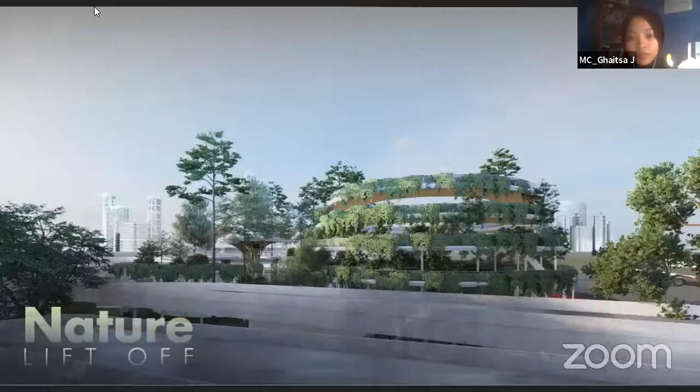Okay, so good morning everyone. My name is Amira, and here I'm with my teammate Zaki as this competition presentation's opener. We're hoping that this will be a good start for other competitive designs. Here we're going to present our thoughts on the future of Eco Park and how it leads to a biodiverse ecosystem in a metropolitan city like Jakarta.

We know that this earth is not only for human living things, and we as human beings must act on how design can focus on creating a more biodiverse environment, such as an eco park. So the precious open land needs an idea to overcome the lack of biodiversity and drastic climate change.

Parallel with the UHI expansion, where the center of Jakarta becomes the starting point of the UHI phenomenon, we decided to focus more deeply into this area. So here my teammate Zaki has been living in Tanah Abang for 2 months for his internship.

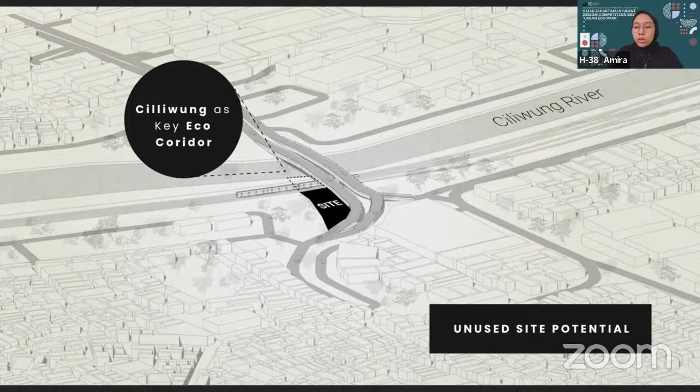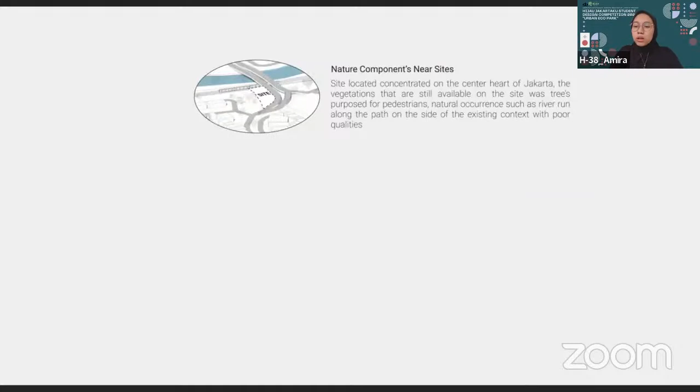Here, we're trying to conclude the site's potential and problems, and how we try to take an approach into the design to make it somewhat more biodiverse, a much better eco park. We need to somehow take the opportunity from the nature component the site gave us. Because of the wasted potential of the site, bordered by railway and bridge, we try to connect it.

So Tanah Abang has been famously known for its highly dense area. It's challenging to accommodate the need for oxygen with only approximately 3,000 square meters of site area. So for a more detailed presentation of our design, it will be presented by Zaki.

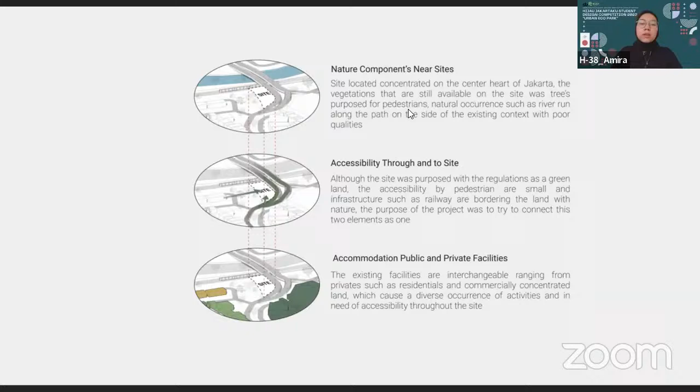It is clear that the lack of nature and biodiversity in urban cities is a pressing concern that requires immediate action. Embracing biodiversity not only benefits the environment and wildlife, but also improves our quality of life and strengthens our communities. Thus, implementing an appreciation for ecological serenity improves the urban scene.

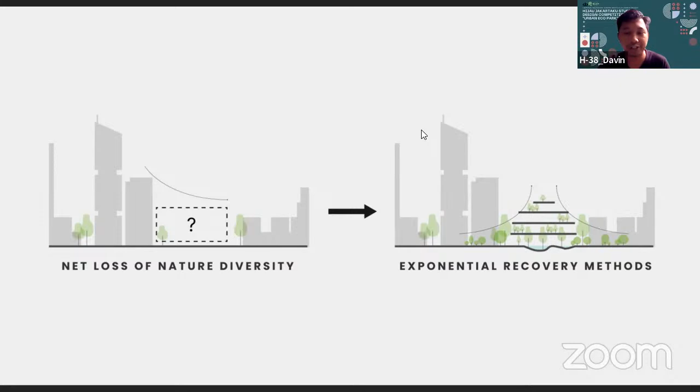Of utmost importance are the sensibilities about how each element is integrated, creating a unique way of living. To improve this further, the proposed design uses a multi-layered plate and implementation of vertical gardens, not just to improve the site's capability to absorb more heat, but also to increase the chance for the environment to thrive and self-regulate, creating symbiosis. This also creates an opportunity to act as a barrier and filtration for regulating microclimate, such as winds that come into contact with the infrastructure.

To develop significant value for the eco park, this parameter was specifically implemented to create justifiable design criteria for the design output: appreciation, meaning taking inspiration and cultural meaning, benefiting from the expression of nature; knowledge, for the purpose of resources, scientific study, and environmental monitoring of the site; products, as in sensible harvesting; and lastly, services, to provide basic life support to the surrounding area.

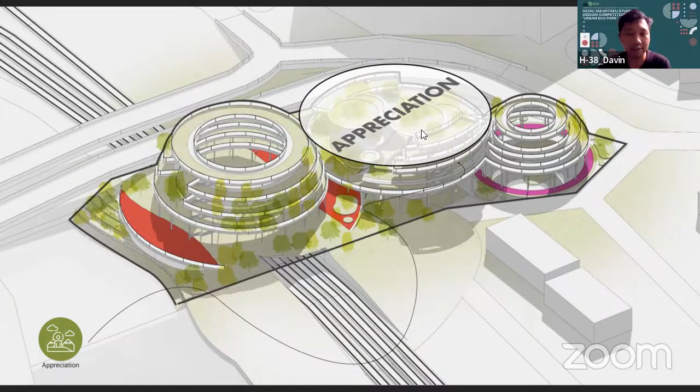The allocated space is about 35% properly, as a research center was implemented for the use of onsite monitoring and flexible adjustment to the environment, with adjoining research facilities for further development.

Eco exhibitions are used for the communities as an interactive way to increase awareness and give codes of conduct in eco parks. The allocated space for this is around 30%.

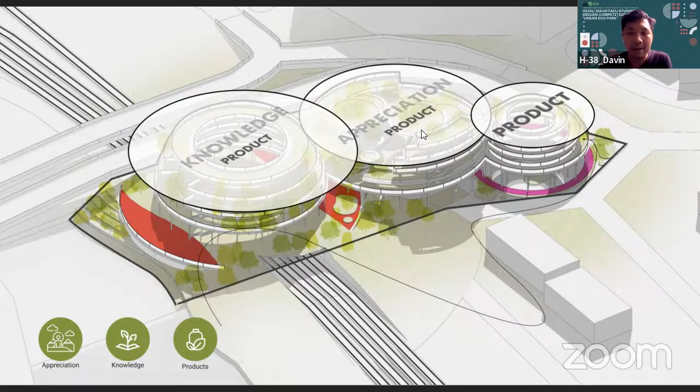To provide a wide range of functions integrated into the design, products are implemented into each module. The plants are used also as a resource for food, such as berries along the path, and ornamentals such as flowers that are responsibly picked and help to maintain. The allocated area for this function is about 50%.

The design is further developed to have integrated functions acting as life support in each corresponding context, to have specific impacts on its unique surroundings. Now we dive more into the allocated program.

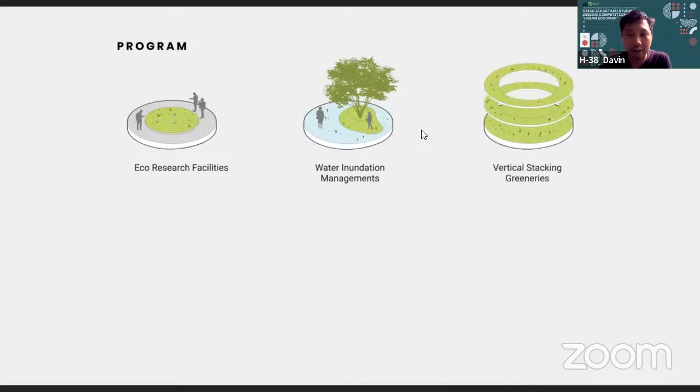The first one is eco-research facilities with a percentage of 5% to be able to handle flooding, and also water inundation management implemented with a percentage of 10%. Vertical gardens are rethought as a stacking mechanism to accentuate a breathing structure through the city with a percentage of 45%. Eco exhibitions as a system of permanent exhibits occur on the site for the community with a percentage of 5%.

A flower meadow with all-seasons blooming creates sustainable relations with pollinators with a percentage of 20%, give or take. Viewing areas to observe nature or for leisure are allocated 15%.

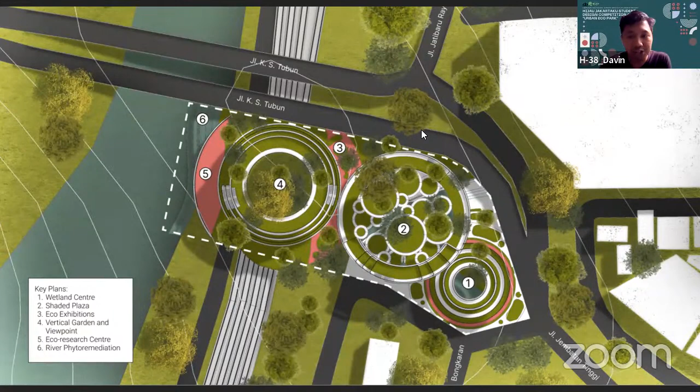Here is the top view of the site plan with the allocated programs that were explained. The ratio of softscape to hardscape is equivalent to about 70% to 30%, showing how nature is prioritized. The site systems used to further increase the function and value of the eco-park include water management, viewing points, habitat preservation and creation, and the use of plants such as all-year-round bloom.

Here are some details of the infrastructure on the site, and here are some visualizations of its use. Firstly, our shaded plaza creates an opportunity for the community to interact, appreciate, and increase knowledge from infoports regarding the ecosystem and sustainable demonstration from the infrastructure.

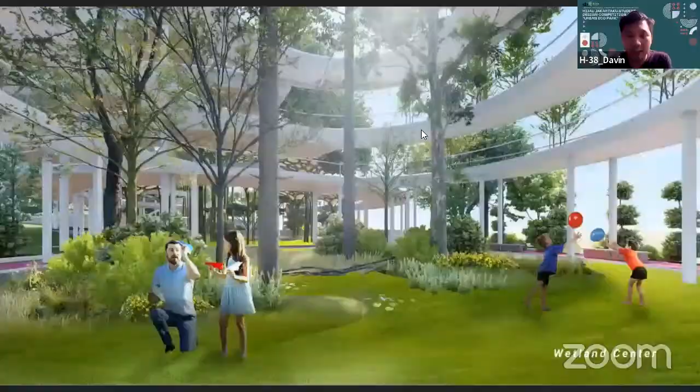The wetland center is designed to be seasonal so that it could be more resilient to unpredictable weather and used as a more active spot for communities. It changes into a more contemplative state, creating a serene look of a pond or lake and providing a sitting area to watch and enjoy the beauty of green and blue elements, while also being beneficial for bioretention using swales.

It changes into a more contemplative state through exhibitions implemented on the site, used for the communities to gain a more knowledgeable aspect from an ecological point of view and increase knowledge for the communities.

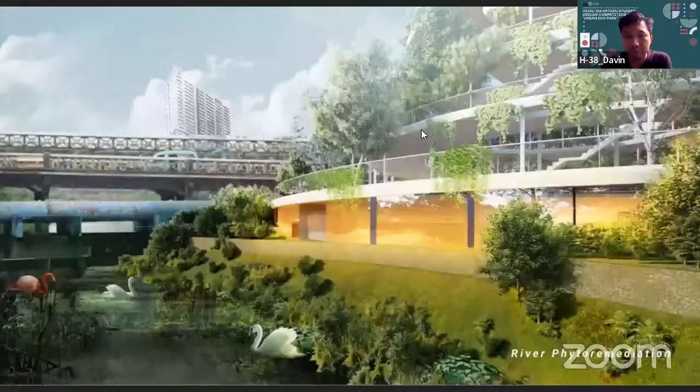This is some information about the river revitalization, designed with the use of the natural mechanism of phytoremediation in hopes of bringing back the river to be a wildlife eco corridor.

Here is the visual of the Eco Research Center with natural daylighting and access for the natural elements on the site to be monitored intensely.

And here is the last visualization about the vertical garden, which also acts as a commerce walkway and viewing point, responsibly connecting nature with the human built environment. Thank you.

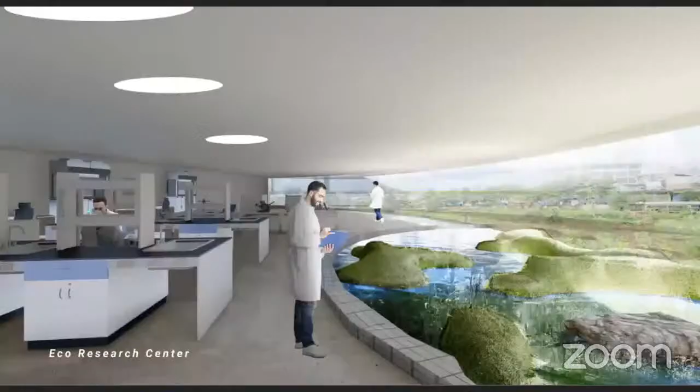Okay, maybe I'm first. We know that an eco park also needs maintenance. Can you hear my voice? Yes, we can. Okay, eco park also needs maintenance—what kind of environmentally friendly maintenance do you propose?

First of all, regarding the maintenance system, we try to implement the research facilities for the most part, but the materials we are trying to use are an easy module design, making it easier to dismantle and adjust for future development. So we try to use some steel and also ACP composite panel materials, so they can be used as recycled materials. And the monitoring from the research facilities helps intensely monitor the surrounding environment more frequently.

Okay, thank you. I suppose now it's my turn. Well, first of all, thank you for the wonderful presentation, wonderful slides, I should say.

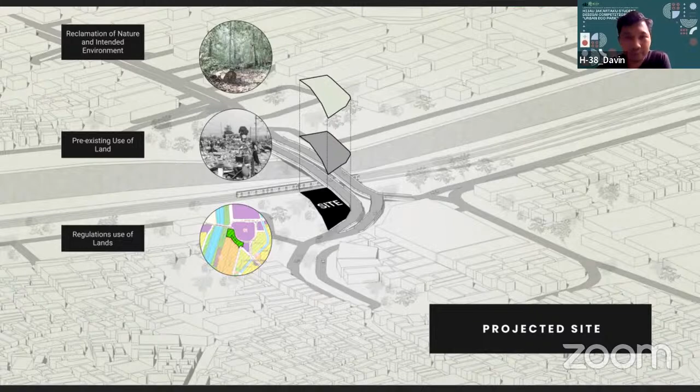All right, I think the first question is answered pretty well. But I believe if you could provide more info on that, it would increase the value of your design.

Well, I'm not talking about today's presentation, I'm talking about when we actually make the design. If we can provide some indicators, that would increase things and be better for us to talk to our clients - that's a selling point. So yeah, I think that's enough. Thank you for your answer. Good luck, thank you.

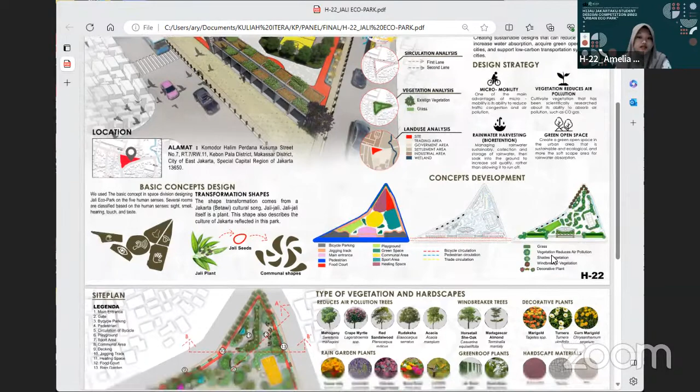There is a main entrance, gate, bicycle parking, pedestrian area, playground, sport area, communal area, bridge, jogging track, healing space, food court, and also a rain garden.

The size of the jogging track uses the standard size of 1.2 meters, with a field of 18 meters by 9 meters facilitated for the sport area. The bicycle parking shelter measures 4.2 meters by 2.5 meters, accommodating 6 bikes. There are 16 bicycle parking shelters with a total capacity of 96 bikes that can be adjusted. We use a minimum standard size of 1.5 meters for rain garden width.

For our type of vegetation, we divide them into first, vegetation that can reduce air pollution according to research, proven to be mahogany, Lagerstroemia, Pterocarpus indicus, Elaeocarpus, and acacia. Then selecting trees in the communal area absorbing pollution can also attract birds as a support for the basic concept of the human sense of hearing.

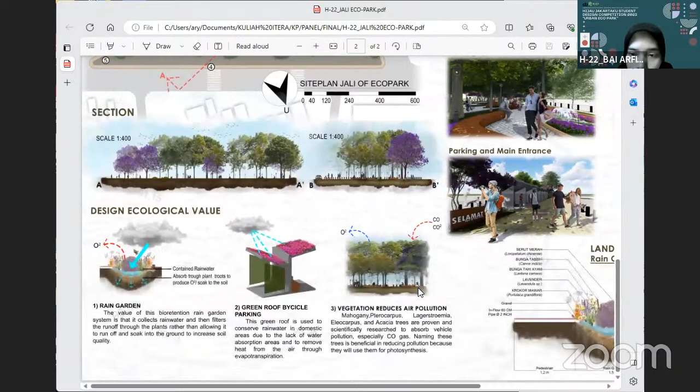Next, this is the design ecological value of our design. The first benefit of this bioretention rain garden system is that it gathers rainwater rather than letting it run off and soak into the ground, increasing soil quality, while the plants filter the runoff. Second, due to the lack of water absorption regions, green roofs retain rainwater in household areas and draw heat from the air through evapotranspiration. Additionally, trees have been shown through scientific research to absorb pollutants, particularly CO gas, because they utilize them for photosynthesis.

Next, this is perspective drawing, such as healing space, pedestrian area, rain garden, parking area, main entrance, and communal sport area.

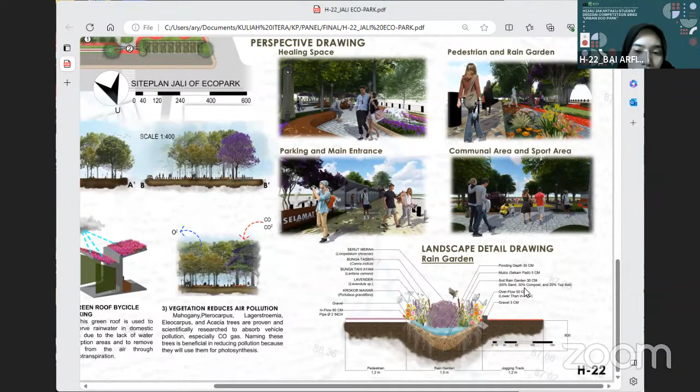Next is our landscape detail drawing of the rain garden. The depth of the rain garden is 60 centimeters, with a soil layer of 30 centimeters, mulch of 5 centimeters, and ponding depth of 30 centimeters, with pipe diameter of 2 inches. That's all. Finally, that's all for our presenting design. Thank you all for your attention.

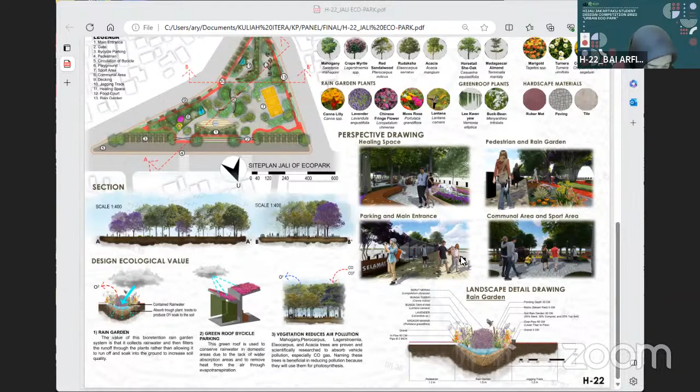Hi, sorry, Bu Celia, can I ask first? Yes, you can ask first. Okay, thank you. So, the second presenter, yeah, the second one. Question number one: what do you think is your strength in this design, that makes us have to choose you as a winner? That's question number one. Question number two, it's again the same question as the first contestant: if you have one more day, what would you do?

Okay, I will answer the first question: what do you think is the strength in this design? Our design has ecological value. First, we have a method to collect rainwater and filter the runoff through plants rather than letting it run off. This rain garden will increase soil quality - that's the first value. Second, we use a green roof method to remove heat from the air through evapotranspiration, then absorb and conserve rainwater, since this domestic area lacks water absorption.

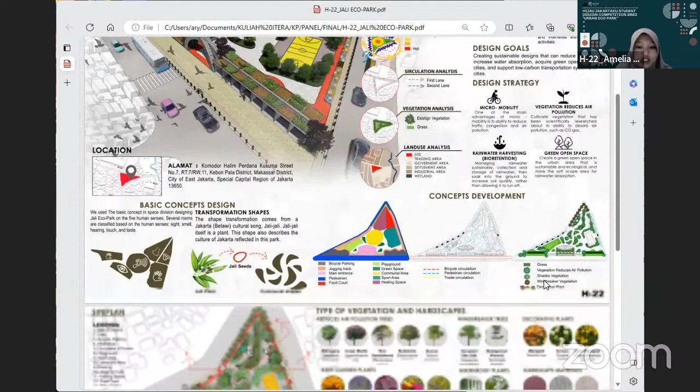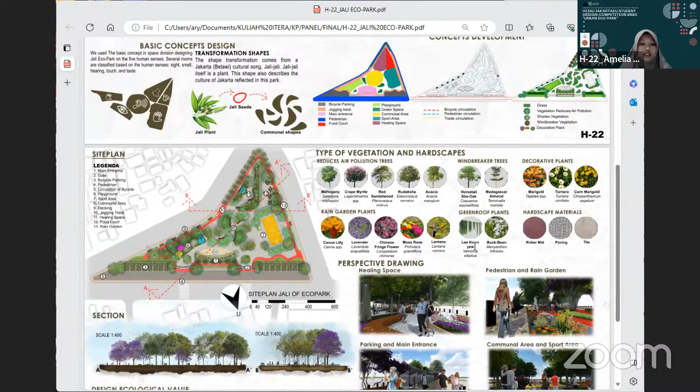Thank you. Okay, for microclimate analysis, the wind blows from east to west, so we planted windbreaker vegetation in this area. So when wind blows into this side, the vegetation will break the wind, making it not blow too strongly on this side. That's the first point. Second, the edges of the site are cool, but the middle area is hot because there's no vegetation for shade. So we planted shade vegetation such as mahogany, Lagerstroemia, Pterocarpus, and Acacia. That's the answer.

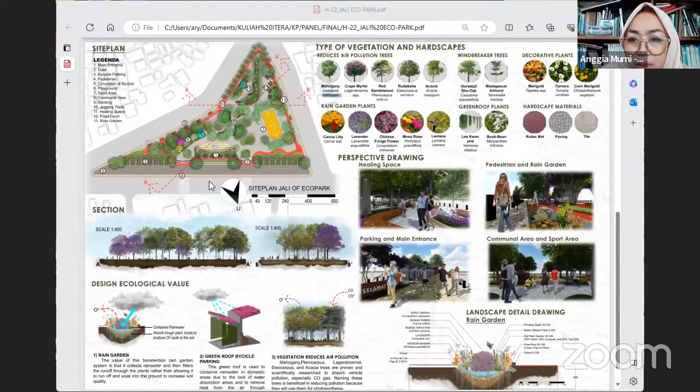Okay, tell me about the green roof plants that you choose. Which part of the green roof did you make? Oh, that area, okay right. Green roof area is located at the bicycle parking here. So bicycle parking is a bicycle parking shelter, using the green roof over here. We use the green roof for bicycle parking in here and here.

That's the consideration. I don't see where you put the Vernonia in this shelter. Sorry, I don't see where you planted the Vernonia in your green roof. Oh yeah, that's a mistake. Oh okay, never mind. Okay, that's enough from me. Thank you.

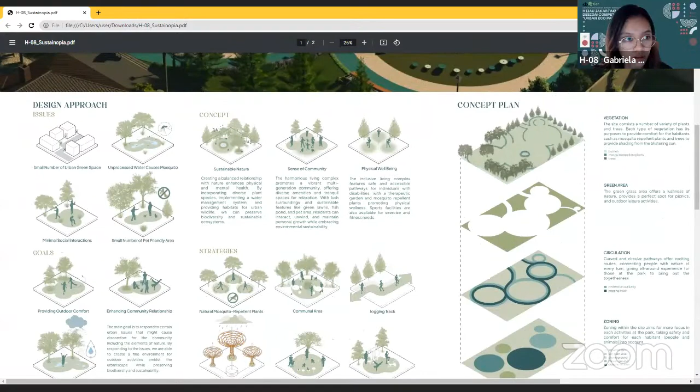One of the most important parts of a design is to know whom the design is for. Sustainopia mainly aims to involve people of all ages, including animals. People will be able to enjoy the beauty of urban nature, along with having interactions with other natural elements such as plants and animals. By incorporating people, pets, and wild animals in the same space, we are able to create and support biodiversity in today's urban environment.

Sustainopia has an area of 2,294 square meters, spread within the densely populated residential area of Jalan Alam Segar, Kebayoran Baru. From the diagram, we can see that the sun rises from the right part of the site to the left. The site can be accessed from 3 different parts: north, west, and south.

The area around the site does not contain much vegetation. The greenery around the site is only provided by trees and a few small plants from the residents' houses. The site is also surrounded mostly by buildings, residential and a few commercial. We chose this location for Sustainopia mainly to provide greenery close to the commercial area that causes pollution, and because there are rarely usable green open spaces around the area. As seen in the diagram, the site area is also dominated by buildings and road pavements with very few vegetation.

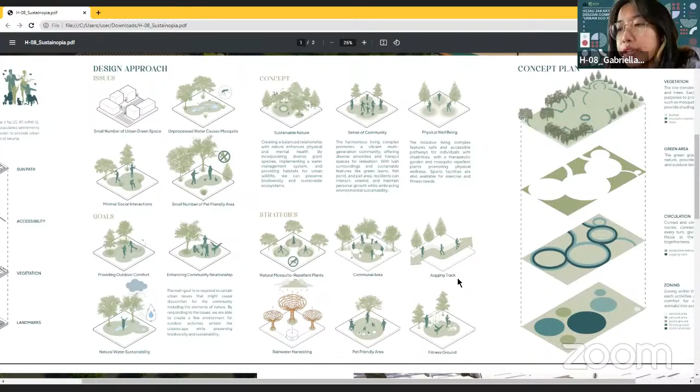The last concept is physical well-being, crucial for a healthy lifestyle. Sport facilities also play a significant role in promoting exercise and fitness. We came up with two strategies: the establishment of a jogging track, providing residents with a dedicated space for running and staying active, and creating a fitness ground that offers various exercise options catering to different fitness needs.

Sustainopia also consists of a variety of plants and trees. Each type of vegetation has its own purpose in providing comfort for the inhabitants, such as mosquito repellent plants and trees to provide shading for the park from the blistering sun. Aside from that, there are also bushes along the park to mark its territory, giving a feeling of security. The green area of grass offers the lushness of nature and provides a perfect spot for picnics and outdoor leisure activities.

The circulation has a curved and circular pathway that leads human circulation within the park. The shape offers exciting routes, connecting people with nature at every turn and giving an all-around experience for those at the park, bringing out more togetherness between visitors.

The purpose of zoning in the park is to create focus for each activity held there. Zoning also provides safety and comfort for visitors, including animals, when doing their activities. For example, pets playing in the pet park will not interfere with people doing fitness activities at the fitness ground.

Okay, moving on to the next drawing. So here's the site plan that shows the whole area of Sustainopia.

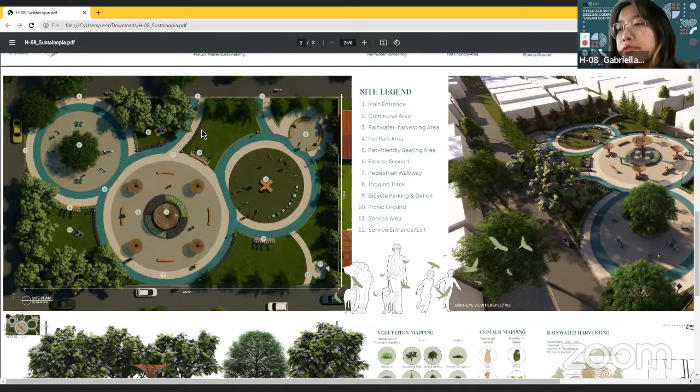For the next drawing, we have a bird's eye view perspective that provides a clearer division of the three main areas mentioned before, along with the green area. Moving on to our sections, we have two sections.

We also have trees, including jacaranda, both blue and pink varieties, and pine trees. For example, the flowers in the communal area are specifically cultivated with lavender and chrysanthemums, which attract butterflies and bugs for pollinating the flowers.

And there's also a pond to support fish.

Moving on to the longitudinal section, we can also observe the fitness ground and pet-friendly areas surrounded by geranium flowers and trees. This area supports pets like dogs and cats, and attracts butterflies and bugs for pollination, as well as birds. To provide a clearer understanding, let's take a look at the rendered image below.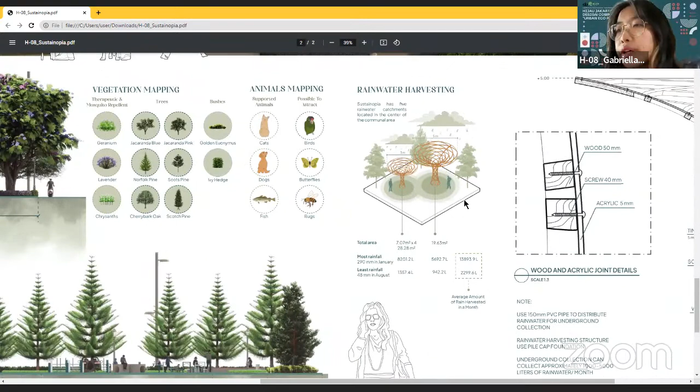As you can see from the drawing, we have 5 rainwater harvesting catchments: 4 that are 3 meters wide, and the other one is 5 meters wide. So how much rainwater can be obtained?

As you can see from the calculation, in the month with the highest rainfall, which is January in Jakarta with approximately 290 millimeters, we can collect an average of 13,893.9 liters. On the other hand, in the month with the least rainfall, which is August with 48 millimeters, we can collect about 2,299.6 liters in one month.

Now let's take a closer look at our rainwater harvesting and communal area detail. On the left, there's a stone paved pedestrian pathway with under-drained pipes for drainage purposes underneath the layers of soil. Next to it, we have a small garden with chrysanthemums and lavender side by side with a fish pond lined with stone cladding on a concrete base.

The rainwater harvesting structure features a 50 millimeter wooden diagrid column connected with metal brackets to the concrete, and 5 millimeter tinted acrylic fastened to the concrete below using nuts and bolts. There's also a detail showing the installation of acrylic to the wooden structure using a 40 millimeter screw.

Additional information about the rainwater system: we use 150 millimeter PVC pipes to distribute rainwater for underground collection, and the structure itself is supported by a pile cap foundation.

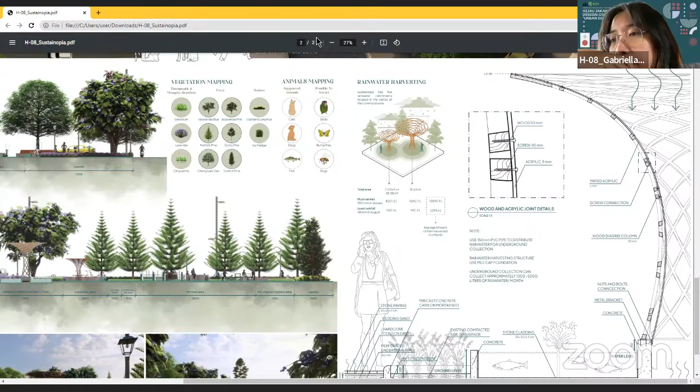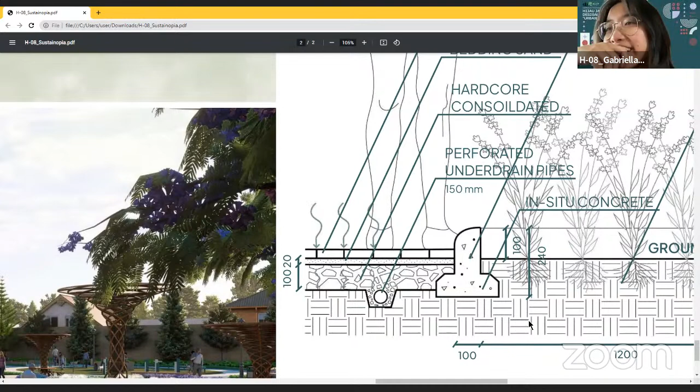There's additional information, so we're not only collecting from the umbrella. There's actually little pipes under the layers of soil. We have perforated under-drain pipes, so it catches the rainwater too from the pavement. We use some paving, so the rainwater can go down and be collected using the perforated underdrain pipes, and then it comes to the underground rainwater storage too.

Okay, let's start from the beginning. First, my question - I saw you and the team calculate the rainwater harvesting. You may harvest from the umbrella area, something like that. I highly appreciate that you made it like that. My question is, after you calculate the rainwater that you can catch, how many did you calculate for the watering of the garden, of the park? How many liters do you need for the watering?

We have not specifically calculated the needs. So you didn't make a calculation of how many liters your garden or park will need for watering, right? But you have the calculation that you made, the catch from your umbrella or canopy - what will you use that for? I saw how many thousand liters, something like that. Oh, we use that for watering the garden and also for... Okay, so you use it for watering, but you didn't calculate how many liters the watering needs, right?

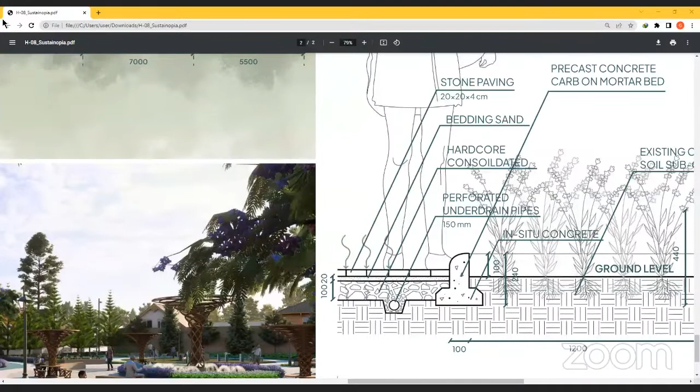Okay, yes, after the umbrella, where does the water go then? Do you have the details, a tank or something like that? From the details, we have underground water, rainwater storage collection. Underground rainwater collection, okay. But you didn't make a calculation also for how big that is, the diameter, the dimension of the underground rainwater collection.

And then did you put the system also there, a filter for some of the dust or something coming with the rain? No system.

Okay, but the idea to collect the rainwater, I really appreciate that. Thank you very much. But then another question, about how big the hardscape you make compared to the green area for the softscape - did you make a calculation for that?

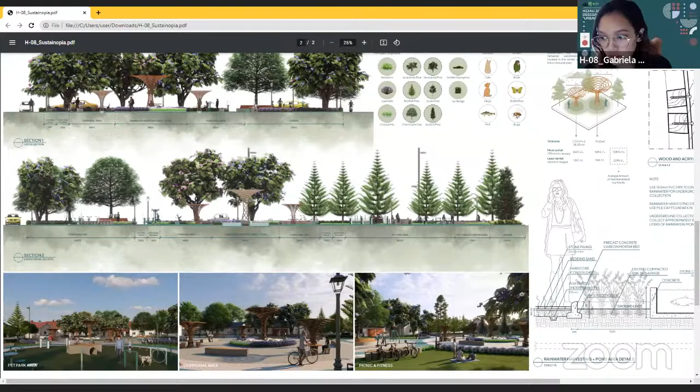Okay, yeah, right. And then how does the bicycle come to the area, to the parking area? Okay, let's say they make a circle, and then how do they go to the parking area?

Okay, are you guys from landscape architecture or architecture? We are from architecture. Okay, just information for you - you already chose a quite good plan, but let me inform you that chrysanthemum is high maintenance. It's not considered suitable for parks or gardens in public areas, and chrysanthemum is also seasonal - they need to regrow every 3 or 4 months. Also, since you used jacaranda in some areas, especially for tropical climates, jacaranda doesn't really bloom the same way as in 4-seasonal countries.

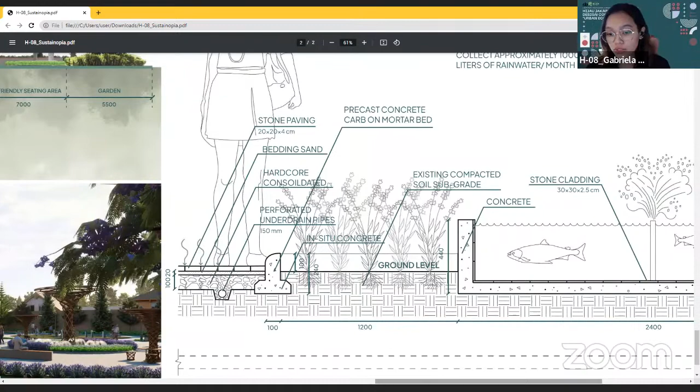The question, and the next one isn't a question, just a suggestion - if you fill the pond with animals, fish, is there a consideration about maintenance for that? For the maintenance of the pond itself, maybe it's still conventional, so we still need help from people, maybe from the community, to also help take care of the water pond, to bring out the sense of community and care, so they can help hand in hand maintaining the park itself. Okay, maybe you can consider that next. Thank you from me.

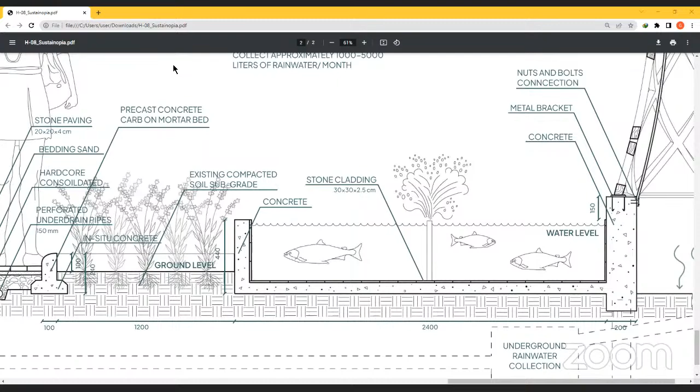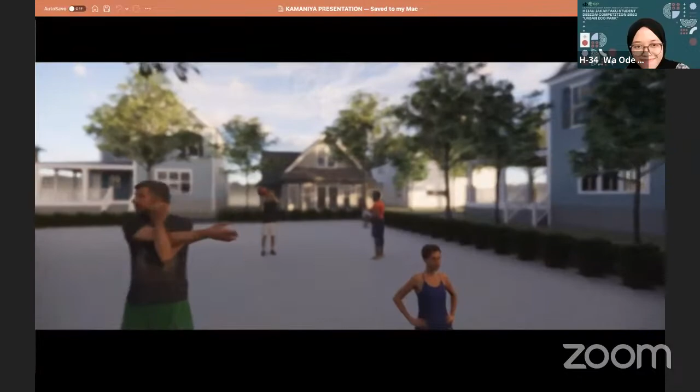Okay, I want to ask a question first. Don't you realize that the air is getting hot lately and we're getting uncomfortable being outside? Because of it, we designed Kamaniya to solve that problem. Kamaniya means beautiful, and it's inspired by the squirrel's way of life.

And why must it be squirrel? Because squirrels never give up if they want to get something. We aim for visitors to experience this eco park not hastily, but by strolling around to behold the splendid view of Kamaniya.

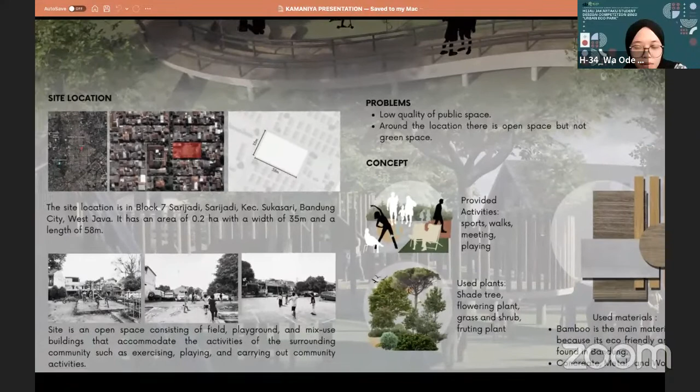The site is located in Block 7 Sarijadi in Bandung City, West Java, with an area of 0.2 hectare, 35 meters wide and 58 meters long. It's an expansive open space comprising field, playground, and versatile building designed to cater to various community activities, including exercising, playing, and hosting community events.

Through analysis of the site, we found the overall quality of this public space falls short of our expectations. One noticeable concern is the lack of green space in the immediate vicinity of the site.

We want Kamaniya to still accommodate people's activities, but we also want to upgrade this area, especially in green space. So we highlight 3 activities on this site: community activity, playing, and exercising.

We have an idea for visitors to get more experience by walking around and enjoying the beauty of Kamaniya. But since we aim to make the site greener, we decided to minimize the hardscape that's stuck directly to the ground. Because of that, we made a pilotis concept for the playground and pedestrian circulation on the site.

For material, we use bamboo as the main material because it's eco-friendly and commonly found in Bandung. We also use other materials like wood, metal, and poured concrete.

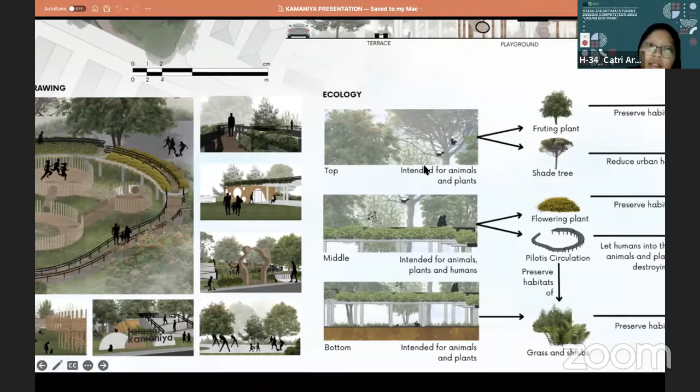And this is the ecological value of this site. It's truly captivating as we have taken deliberate steps to invite and preserve various habitats through strategic plans, divided into 3 distinct levels: top, middle, and bottom, each serving a specific purpose in preserving the local ecosystem. At the top level, we carefully selected fruiting and shade trees that not only provide valuable shade, but also serve as sanctuaries for herbivore animals like squirrels, birds, and other herbivores. The lush vegetation and abundant fruit-bearing trees create a haven for these creatures, ensuring their habitat remains protected and flourishing.

Moving to the middle level, we have adorned the area with a delightful array of flowering plants. These vibrant blooms act as an irresistible invitation to insects, encouraging a diverse range of species to call this place home. Furthermore, we have thoughtfully incorporated a pedestrian pathway within the section, allowing visitors to explore and admire the beauty of Kamaniya from above while also safeguarding the delicate grass and shrubs beneath.

Lastly, the bottom level is dedicated to preserving and nurturing the ground's grass and shrubs. This space serves as a sanctuary for various small animals, including frogs, rabbits, and others. By maintaining this ecosystem integrity, we ensure harmonious coexistence between flora and fauna thrives in this enchanting haven. Through this thoughtful and well-designed approach, we aspire to create an ecological paradise not only to captivate visitors but also to act as a nurturing sanctuary for a diverse range of life that calls this site home.

Mrs. Anggia, perhaps? Yes, my turn now? Okay, right. My question now is with your pilotis design, something like this. Show me the area that disabled people can go through. Because in some parts, is it disabled-friendly or not in your pilotis design?

It's disabled-friendly, Miss, and we have a ramp in front of the eco park, so it can be used by disabled people. I think in this here.

The video stops here? Okay.

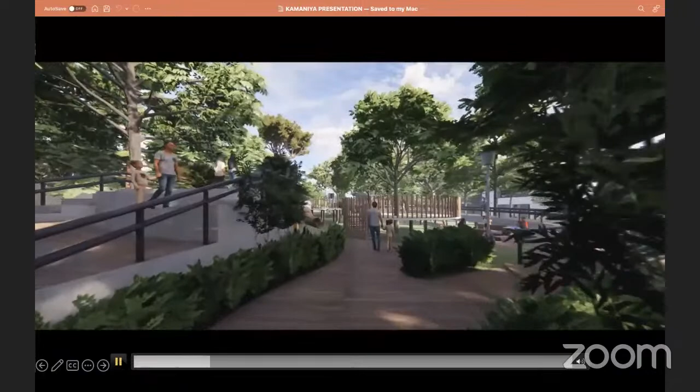Okay, better not the video. Show me the site plan.

Yeah, one of the areas, if you can show it to me. I can see that the wheelchair cannot go through to the... is it what you call that, the bridge or something like that? We call it a ramp. Okay, there is some point in the ramp that I don't think disabled people can go through. Show it to me, as I saw some different level, I saw from the site plan.

So disabled people can enter the eco park with the ramp around, with the wheelchair? Yeah, they can go around, full circle, because we built that at 120 centimeters. Okay, so move your drawing a little bit to the left side, my position, a bit detail.

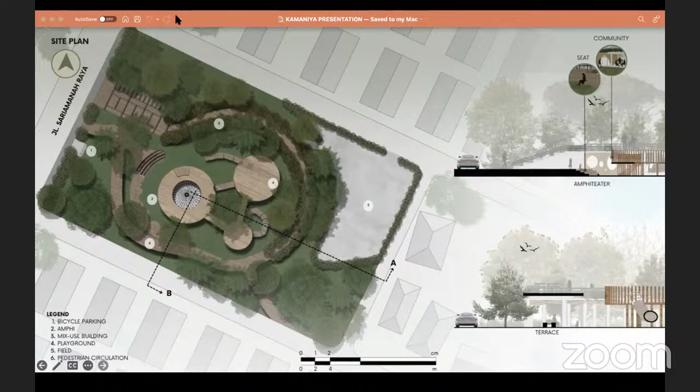Because... yeah, more, it's somewhere here or where? Okay, not here, okay here. I don't know where is my annotation... few options, okay my annotation, somewhere here. How can the people go here? How can the disabled people go here? Can you explain to me?

Hello? Hello, can you hear me?

We can. I will forget about the stair around there, it has 20 centimeters, and... I mean, about disabled people, they can go here for the... did you see my marking here? Yeah, disabled people can go there, but with help from their friend, maybe they can. So it means the wheelchair cannot go up there.

Yeah, that's my question, because in Japan, if you make a design like this, you have to explain from the beginning, because there's a part of the facility that usually disabled people can go up to. Otherwise, you have to explain from the beginning. Yeah, okay.

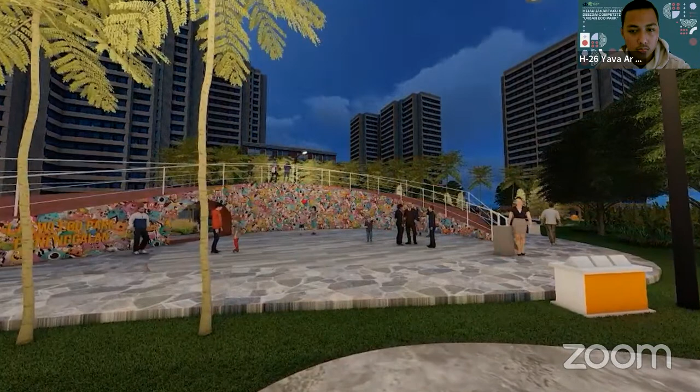Okay, thank you, that's it from us.

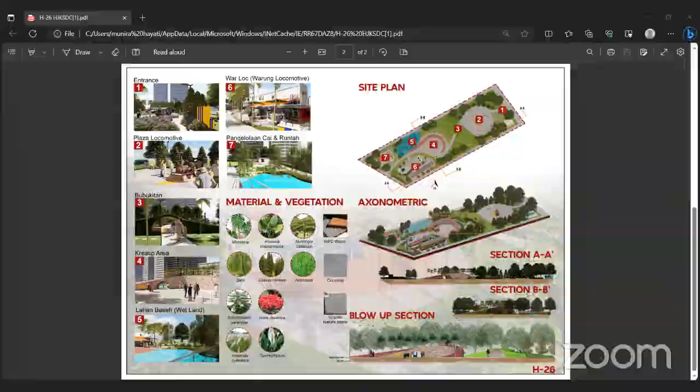So I will answer the question. If we have 5 minutes, what we need to do is make the panel simple. I saw so many texts in this panel, so maybe I can illustrate the text to make the panel more simple.

I understand this site is like a warehouse or something like that. Is there some historic buildings that we need to preserve, and how would you like to deal with that historic building in relation to this eco park that you are designing? Any special treatment, or I don't know?

I'm sorry, can you repeat the question, sir? Yes, I understand this site has many old buildings. Is there some historic aspect of the buildings that we need to preserve, and how can we preserve it in relation to the eco park that you are designing? Is it going to be okay side by side, or is it going to be contrary?

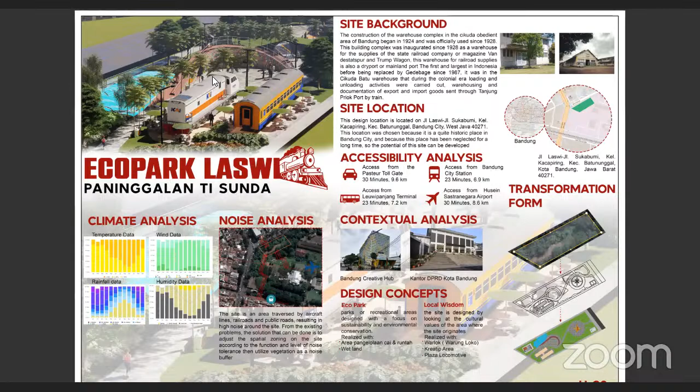For me, what is the specific thing in your eco park that you can explain to us, because one consideration of the eco park is that the eco park has connection with society within the social culture that they have. So what specific thing did you take in your site by consideration of the social culture that you mentioned? Thank you.

Okay, the consideration of the social culture is from the pattern, first of all from the pattern concept and space. So this eco park has a pattern that is balanced asymmetrically, which is the concept like a Sunda concept, which always has a balanced pattern. So that we can see.

Maybe Munira, can you go through slide number 2? As we can see, we have a circle that is asymmetrical, and the other concept is Sunda, famous as a gathering people or ngariung. So we provide places to gather, like in number 4 and number 2, places we can use to gather around or do something like live music, or maybe activities for mothers and so on.

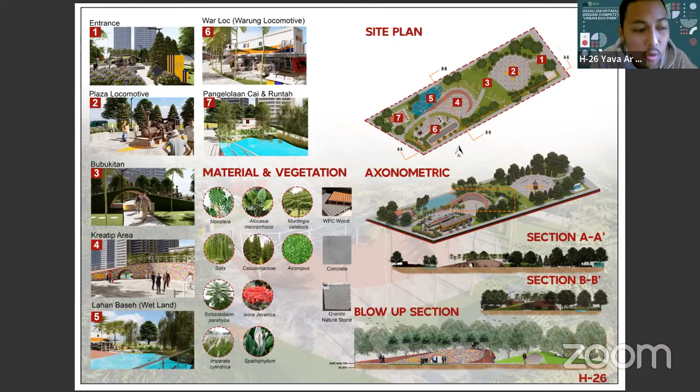Okay, I think I can understand. Okay, because your presentation time is already up, I heard that, but that's only my time for asking you about your concept. Thank you, but I'm okay with this time. Thank you, we can move on.

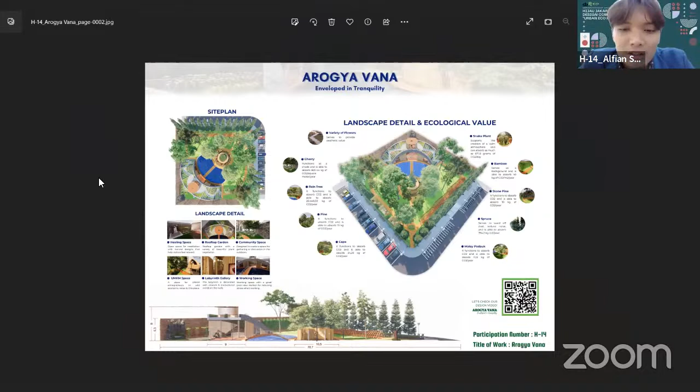I would like to state thank you for the opportunity given to us to take part in the final round of the student design competition Hijau Jakartaku 2023. Before I turn to the presentation, let me introduce myself. My name is Alfian Saidaki Anajili. On this occasion I will be accompanied by 2 of my colleagues, Ham Okrian Gultom and Justina Galo. We will present a design work entitled Arogya Vana.

In macro scale, the design location is located in West Jakarta City, referring to the DKI Jakarta Spatial Plan for 2030. The city of West Jakarta has a role as a trade and service center area. In a more micro scope, Palmerah District is planned as the central office area of West Jakarta. In an even smaller scope, the design location is a small part of Kemanggisan Kelurahan. The design area has an area of around 2,500 square meters. In the detailed spatial plan, the design area is planned as a trade and service area and is allowed for park development. In terms of land ownership status, referring to data from the Ministry of Agrarian Affairs and Spatial Planning/National Land Agency, the ownership status is HGB, or hak guna bangunan, meaning the land to be used as the planning area is owned by the DKI Jakarta government.

Based on the results of the online survey and data obtained from online research, there are several potentials that make our design attractive. First, the site is passed by the collector street Letjen S. Parman, which connects West Jakarta with South Jakarta and North Jakarta, and is located in a strategic location at Junction Slipi. Lastly, the park development plan is in accordance with the direction of the detailed spatial plan.

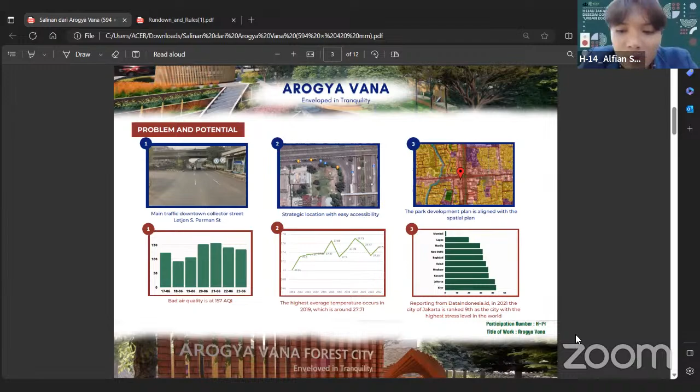There are also several problems that concern us in determining a design concept appropriate to the existing issues. Referring to air quality data, air quality around the design area is consistently classified as unhealthy, with an AQI range of more than 100. Referring to BMKG data, over the last 10 years the average temperature around the design area has increased in aggregate by 0.51 degrees Celsius. Reporting from dataindonesia.id, in 2020-2021 the city of Jakarta was ranked 9th as the city with the highest stress level in the world. Based on these potentials and problems, a design issue is obtained, namely the need for a public space that has a recoupling function, both for nature and for humans.

Next is our design concept, where we take the theme Bio-Rest, namely Biophilic Forest City. The concept of biophilic forest city refers to urban development that applies biophilic principles by emphasizing the connection between humans and nature, and the presence of extensive forests or green areas inside or around the city. Biophilic forest city strives to create a sustainable urban environment by integrating natural elements such as parks, trees, and green space to improve the quality of life for city residents.

In our design concept we have 5 core values. First is human-nature connection, meaning focusing on creating spaces that foster relationship and interaction between humans and the natural environment. Next is natural landscapes, involving the integration of natural elements such as rocks, stone, and the ambience of a natural landscape. Next is beauty and aesthetic: biophilic gardens are designed to be beautiful and visually appealing, a thoughtful combination of natural elements and design elements. Next is sensory stimulation, where the biophilic garden offers a range of sensory stimulation. The last is simplicity, meaning the meditation garden design tends toward appeasing simplicity.

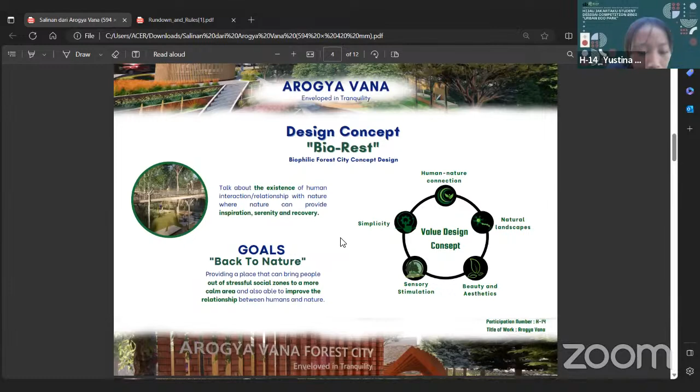Okay, the next is spatial concept and vegetation concept. In the spatial concept, there is a labyrinth art gallery located in the middle of the site. This art gallery is designed as a maze where the visitor can explore various exhibition spaces and artwork interactively.

There is a lake connected by a bridge leading to the working space and rooftop garden. The working space serves as a place for work, while the rooftop garden functions as a healing area. At the back of the site, there is a meditation space equipped with waterfall features, serving as sound barriers from urban traffic noise.

And the next is Arogya Vana. Arogya Vana is taken from Sanskrit, meaning healing forest, with the tagline 'enveloped in tranquility.' Given the condition of the city of Jakarta, which is filled with various activities, mobilization, and social pressure, the need for open space as a place to rest and calm the mind is very important.

Therefore, with this design, it is hoped that it can become a medium for the surrounding community to feel comfortable, calm, fresh, and cool, for both humans and the surrounding environment, like a forest atmosphere, in the concept of biophilic forest city concept design.

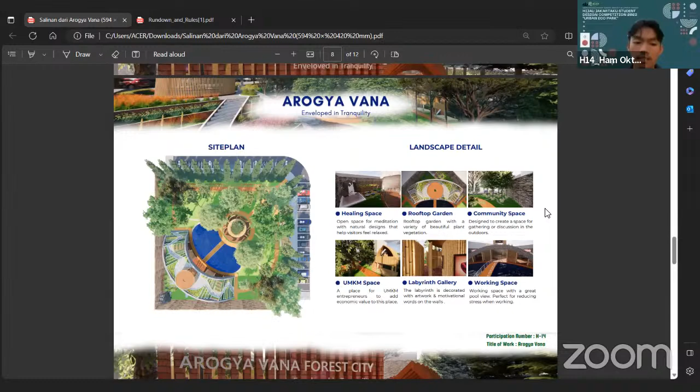The selection of vegetation in our design is based on the vegetation concept presented previously. For noise reducer trees, we chose spruce. For carbon sink trees, we chose trees with a good ability to absorb carbon dioxide, including rain tree, pine, cape, Malay padauk, and stone pine.

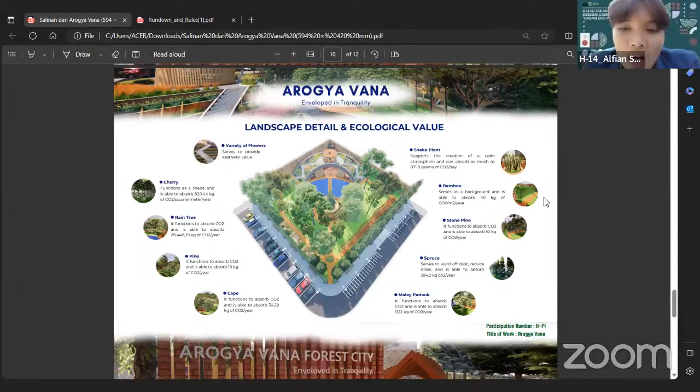And the last one, we add several types of flowers that have aesthetic and ecological value, one of which is the snake plant. Okay, and for the last part, I will show you the result of the render.

Okay, Bu Anggia, please. So can you please go back to the site plan, please? Please let me know the healing space from the site plan.

Okay, I'll go and answer in the question corner. The healing space is there, behind the working space and rooftop garden, because this is the most suitable space for healing, with a wall or glass separating it.

Yes, I can see the healing space now. So people from the working space, they can see the healing area, right? Yes, ma'am.

Do you think that people who usually need time and space for healing really need privacy? I mean, they don't like it if, for example, yourself, if you need healing, do you like people seeing you sitting there? So even people from the working space may see the healing space, right? Yeah, that's right.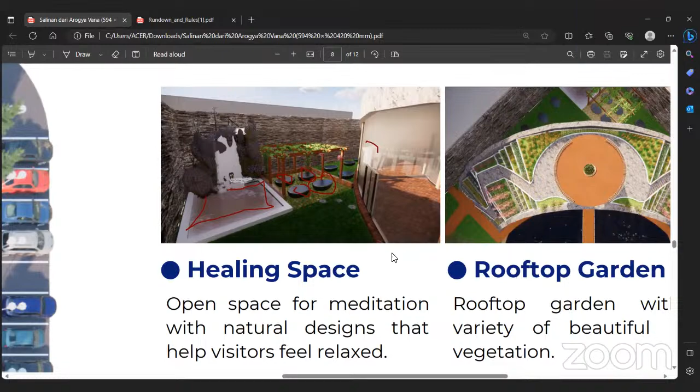Yeah, what is that made from, for your imagination or concept? Okay, I think that's made from stone. Okay, now explain to me about the rooftop.

Okay, I have to clean the area first, erase it. Okay, for this rooftop, what technique did you use to make it disabled friendly or not? Okay, may I answer in Bahasa?

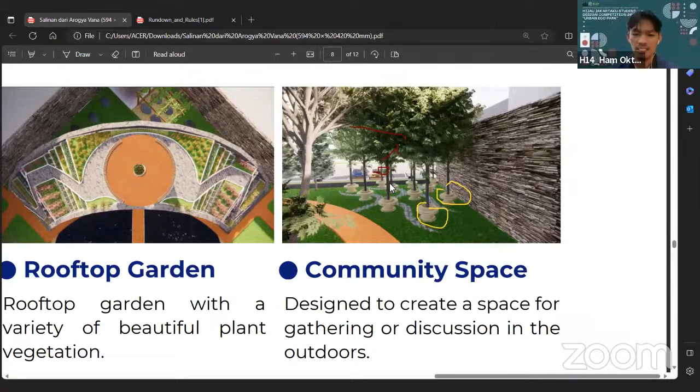Mas Rahman first. Okay, if Mas Rahman is not ready yet, maybe I have one question for you.

What dominant material did you choose for the hardscape to build this park? Okay ma'am, the building material used in this design is especially natural material that is focused. The first one is wood, and then there are stone and also glass.

Okay. From what I see the wood is dominant, so what consideration did you make to maintain the wood?

Okay, from the design, for the wood, we use teak wood. In Indonesia, we call that kayu jati, due to its strong and durable condition, so it will be strong for the weather and also have a long duration for the wood.

Okay, maybe it's just a suggestion. Kayu jati is expensive, much expensive, so if you want to make a design for the next one, you have to consider that. That's my question, thank you.